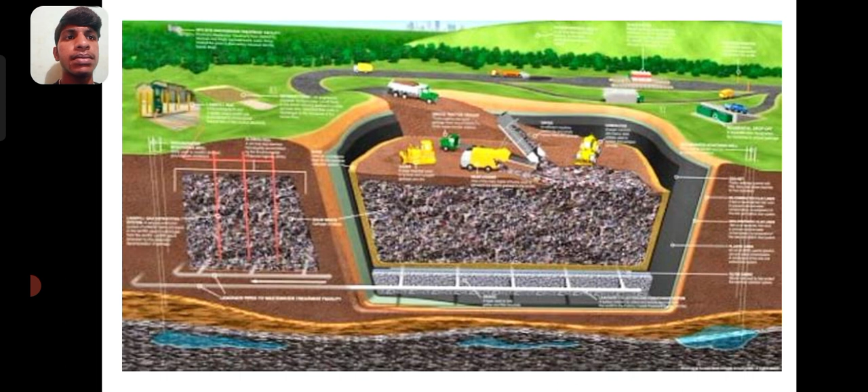Today I will discuss landfill and the factors considered while selecting a landfill site. What is landfill? A landfill is an engineered method for land disposal of solid and hazardous waste. Landfilling is the term used to describe the process by which solid waste is placed in the landfill.

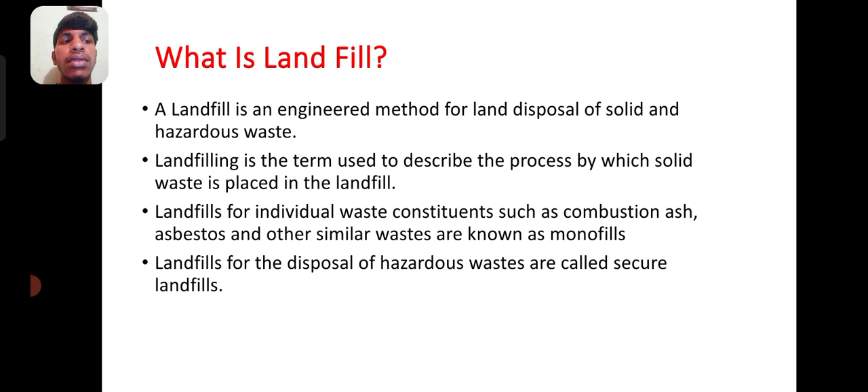Landfills for individual waste constituents such as combustion ash, asbestos, and other similar waste are known as monofills. Landfills for the disposal of hazardous waste are called secure landfills. A landfill need not be an engineered site when the waste is mostly inert at final disposal. In rural areas, waste contains a large proportion of soil and dirt. The practice of disposal of such waste is called the non-engineered disposal method.

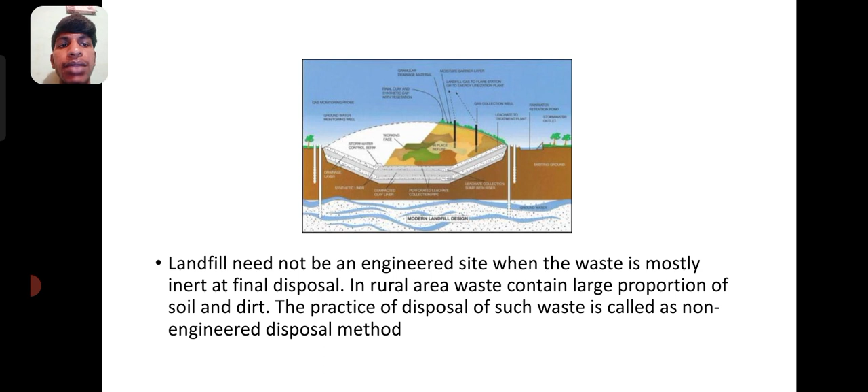Principle. The purpose of landfilling is to bury or alter the chemical composition of the waste so that they do not pose any threat to the environment or public health. Landfills are usually made up of cells in which a discrete volume of waste is kept isolated from adjacent waste cells by a suitable barrier. The term cell is used to describe the volume of material placed in a landfill during one operating period.

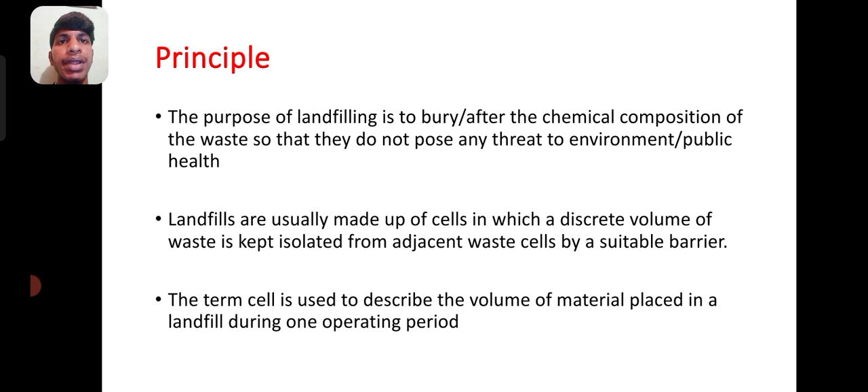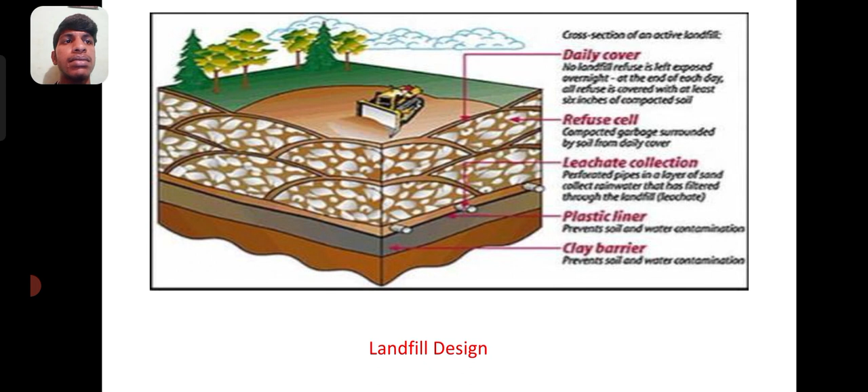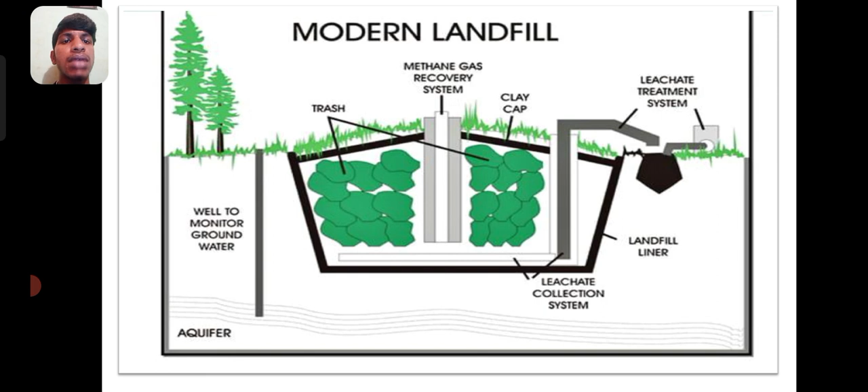Landfill designs. It contains daily cover, refuse cell, leachate collection, plastic liner, clay barrier. Modern landfills. Above the landfill: trash, methane gas recovery system, clay cap, leachate treatment system. Under the landfill: liner, leachate collection system, well to monitor groundwater.

Characteristics of landfill. Solid waste is placed in a suitably selected and prepared landfill site in a carefully prescribed manner. The waste material is spread out and compacted with appropriate heavy machinery. The waste is covered each day with a layer of compacted soil. The most important feature of modern sanitary landfill design is the technology used to prevent groundwater pollution. It relies on containment rather than treatment.

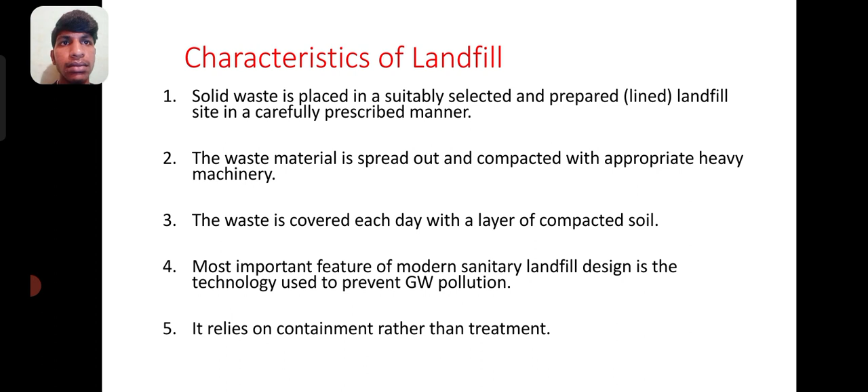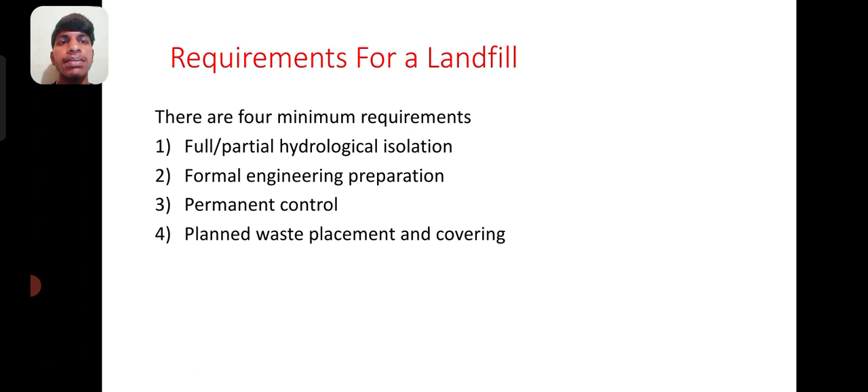Requirements for a landfill. There are four minimum requirements: first, full or partial hydrological isolation. Second, formal engineering preparation. Third, permanent control. Fourth, planned waste placement and covering. Important aspects of the landfill process. The feasibility of land disposal of solid waste depends on factors: type of solid waste, quantity of waste, characteristics of waste, laws and regulations, soil and site characteristics.

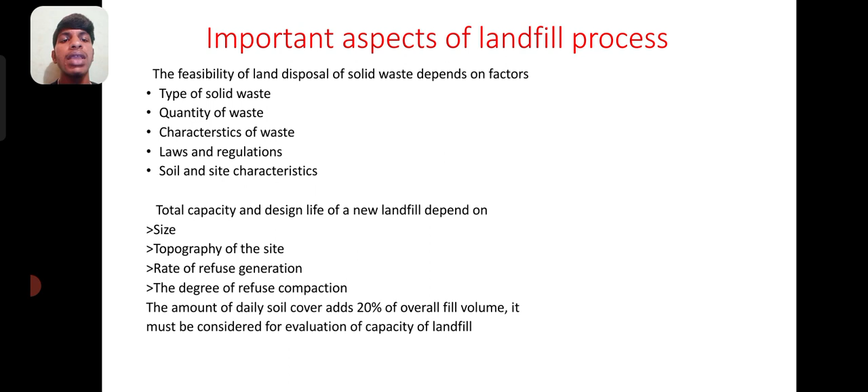Total capacity and design life of a new landfill depend on size, topography of the site, rate of refuse generation, the degree of refuse compaction, and the amount of daily soil cover, which adds 20% of overall fill volume. It must be considered for evaluation of the capacity of the landfill.

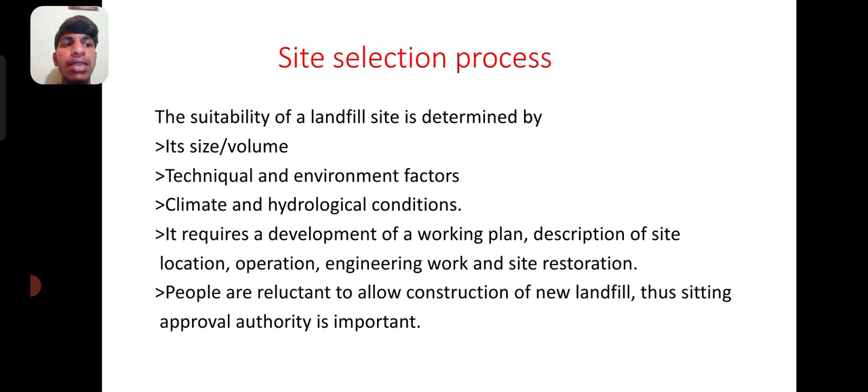Site selection process. The suitability of a landfill site is determined by its size, volume, technical and environmental factors, climate and hydrological conditions. It requires development of a working plan, description of site location, operation, engineering work and site restoration. People are reluctant to allow construction of new landfills, thus siting approval authority is important.

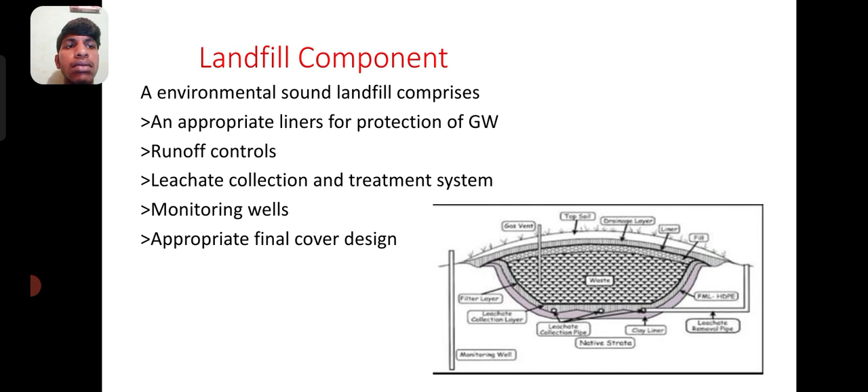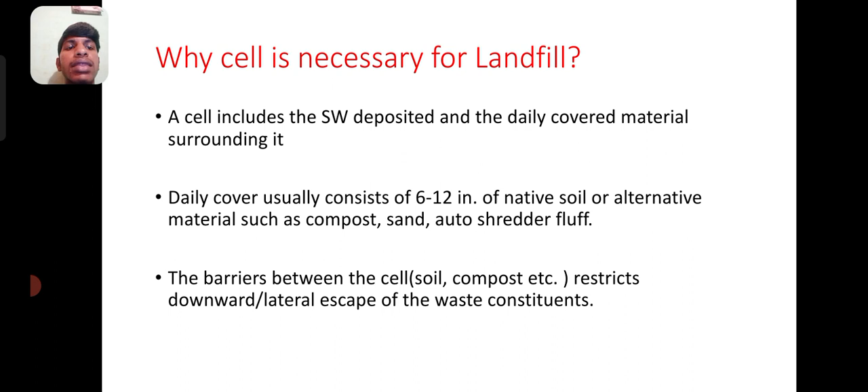Landfill components. An environmentally sound landfill comprises appropriate liners for protection of groundwater, runoff controls, leachate collection and treatment system, monitoring wells, and appropriate final cover design. Why is a cell necessary for a landfill? A cell includes the solid waste deposited and the daily cover material surrounding it. Daily cover usually consists of 6 to 12 inches of native soil or alternative material such as compost, sand, or auto shredder fluff. The barriers between the cells, like soil, compost, etc., restrict downward and lateral escape of the waste constituents.

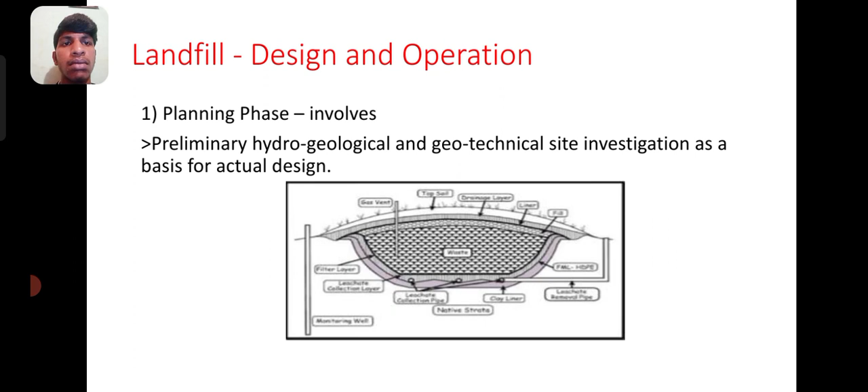Landfill cells. Landfill design and operation. First one, planning phase. It involves preliminary hydrogeological and geotechnical site investigation as a basis for actual design, shown in the figure. Second one, construction phase. It involves earthwork, road and facility construction, and preparations like liners and drains of the fill area.

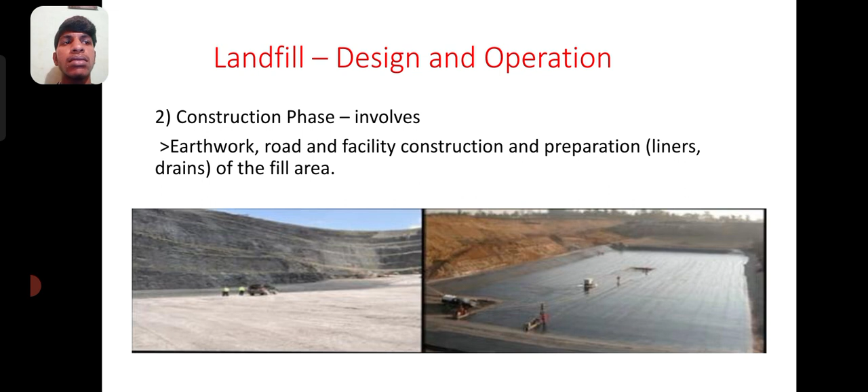Third one, operation phase. It is 5 to 20 years. It involves work at the front of the fill area, operation of environmental installations, and completion of finished sections, with high traffic intensity.

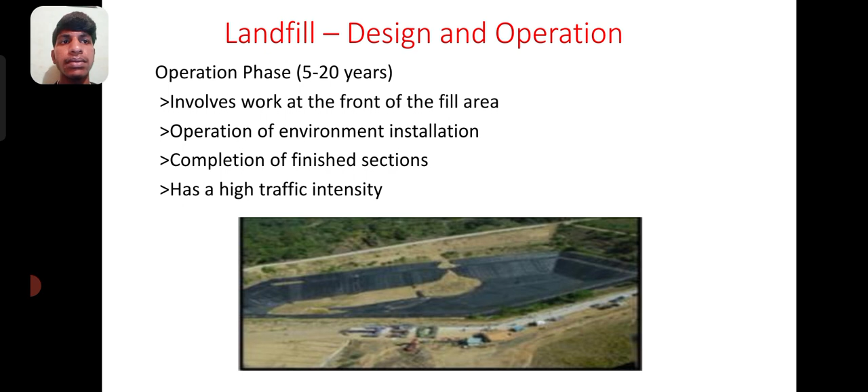Fourth one, completed phase. It involves 20 to 100 years. It involves the time from termination of actual filling to when the installations no longer need to be operated. The emissions may have decreased to a level where they do not need any further treatment and can be discharged freely into the surroundings. Fifth one, final storage phase. In this phase, the landfill is integrated into the surroundings for further purposes and no longer needs special attention.